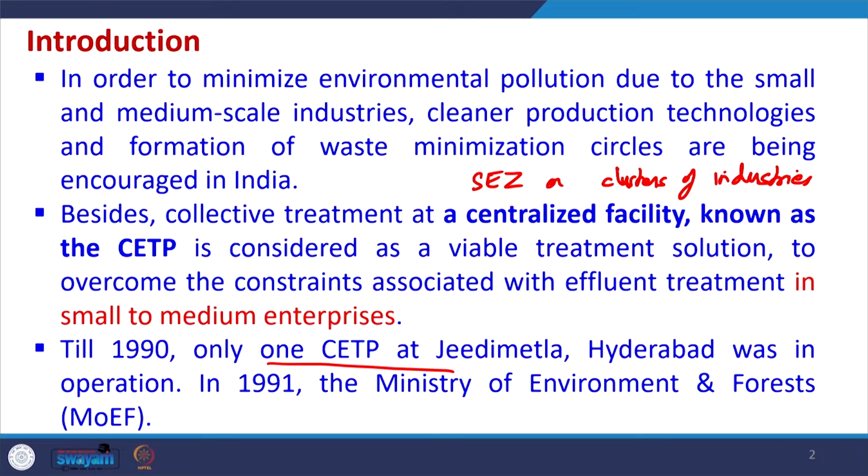Till 1990 only one CETP was functional, in Hyderabad. After that the Ministry of Environment and Forest, nowadays called the Ministry of Environment, Forest and Climate Change, has been pushing for using CETPs to treat effluents generated in small and medium enterprises. The government of India initiated a financial support scheme for CETPs to ensure the growth of small and medium entrepreneurs in an environmentally compatible manner.

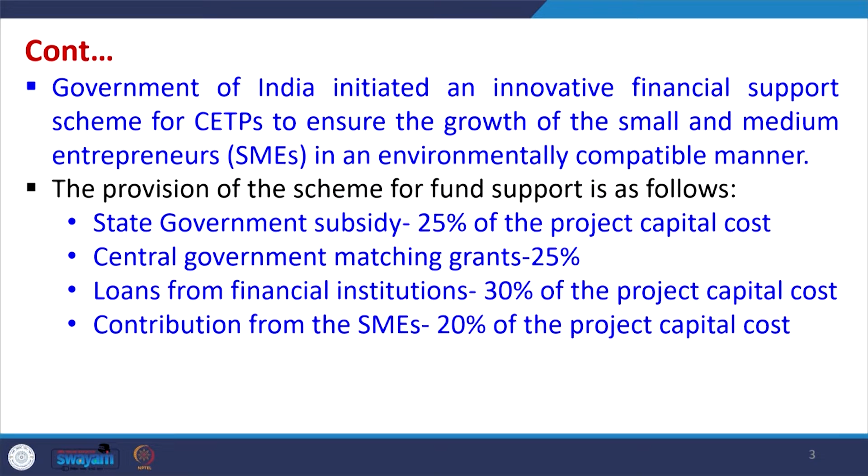The provisions of the scheme for fund support are: the state government gives a subsidy of 25% of the project capital cost, the central government gives a matching grant of 25%, and loans from financial institutions are available. The small and medium enterprises have to give around 20% of the project capital cost. This is how CETPs are being implemented.

Now, the concept of CETP was adopted to achieve end of pipe treatment of combined wastewater and avail the benefit of scale of operation. If individual industries start treating the water, they will require a lot of land space, energy input and cost input, which will cause problems because the amount of water generated in these industries may be small. If we combine all the water, the amount will be high, the treatment can still be done, but the cost comes down tremendously. To avail this benefit, the concept of CETP has been adopted.

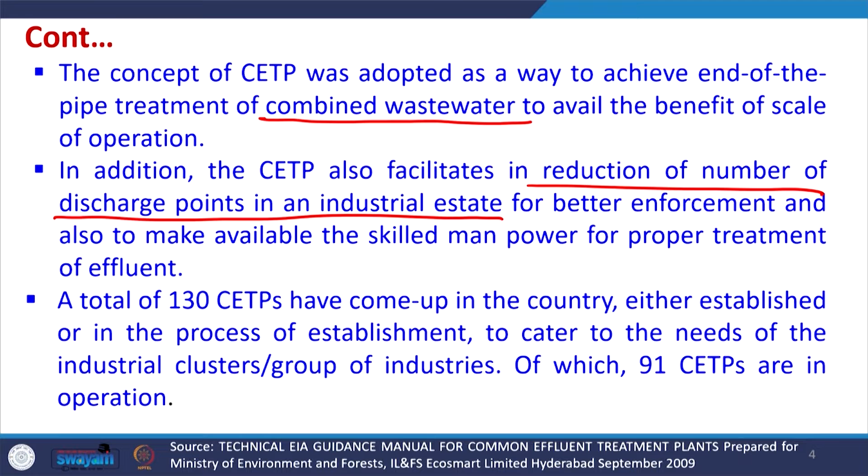In addition, CETP also facilitates the reduction of the number of discharge points in an industrial estate. If we have an industrial cluster and each industry has its own discharge point, it is difficult to manage and enforce the norms made by the government. But if the CETP is there, we have only one discharge point, which can easily be monitored and enforced.

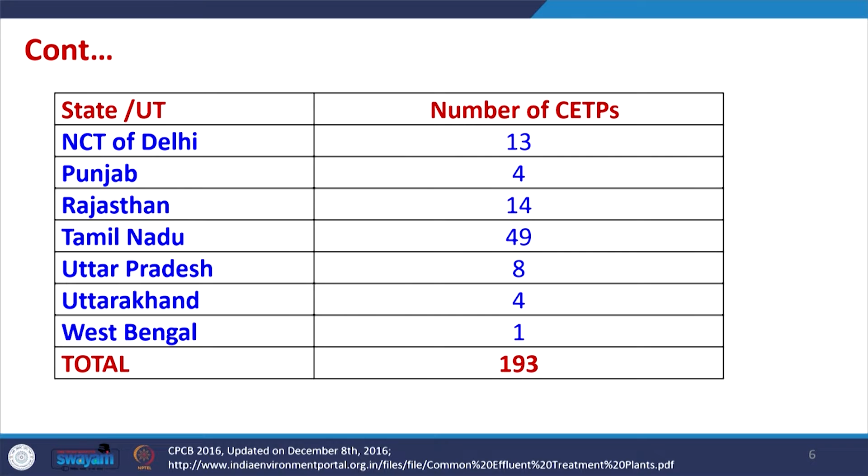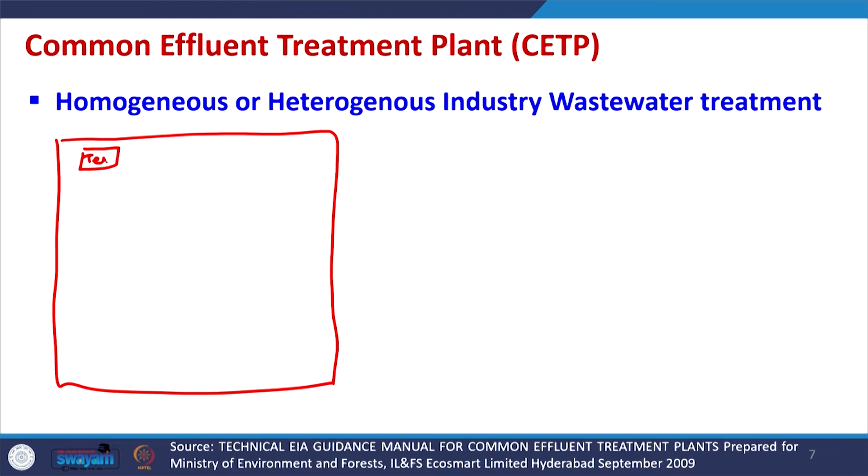Now, these CETPs can treat homogeneous and heterogeneous industrial wastewater. Let us try to understand how they work. Suppose we have a cluster of industries, which we are marking here. One of the industries may be textile, another may be pharmaceutical, and another may be producing some other type of chemicals, maybe a food processing industry.

Similarly, another industry may be there where other types of products may be formed, like surfactant, detergent, etc. So, these are different industries. Now, each of them may have to adopt a different treatment strategy for their wastewater. What is done is that all these industries are told that they have to adopt some treatment strategy. So, this is called ETP or primary treatment strategies in each of the plants.

So, each unit will be having some primary treatment, we can call it PT, or many of the industries have to adopt more treatment, so it may be up to ETP also. After that, they do not go up to the standards, they only perform primary treatment, and the effluents generated from all these industries are merged together, and we have a larger CETP which actually treats the effluent. So, this is the strategy which is adopted.

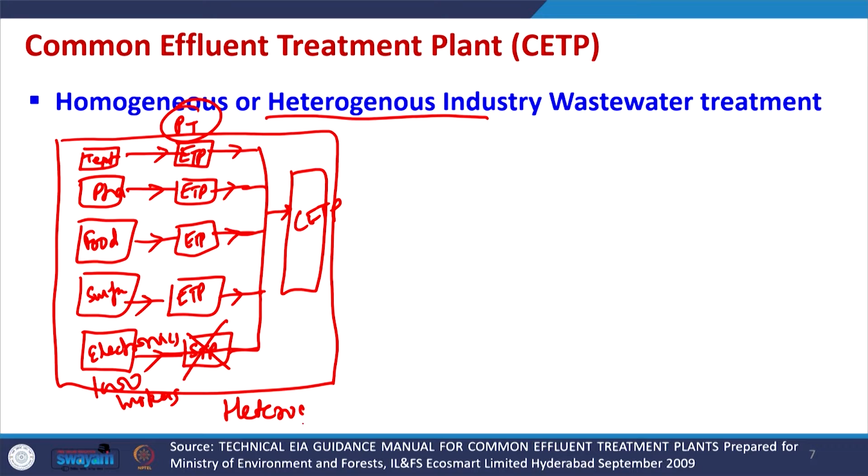Similarly, there is a possibility that in an industrial cluster only one type of industry is there. Suppose all the industries are pharmaceutical: pharmaceutical 1, pharmaceutical 2. Similarly, I have seen myself that in one of the clusters only electroplating industries were there. So, I am writing just EP. All the industries are electroplating.

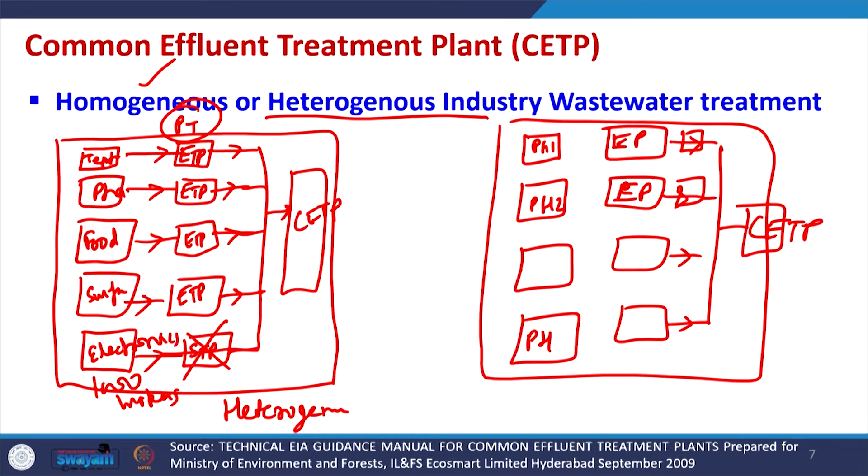Under that condition they may not require any treatment. If they have the same characteristic, the water may directly get combined and go into the CETP. If their characteristics are different, some primary treatment may still be used in some of the industries, while others may not. So, we have the possibility of homogeneous industrial wastewater treatment: all pharmaceutical, all electroplating, or all textile units. Depending upon that, the wastewater generated will go into the CETP.

Now, understanding the advantages of CETP. The advantage is that it facilitates economy of scale, because we are treating a large amount of wastewater. The treatment cost in rupees per liter will go down very quickly, because we are treating a large amount of wastewater as compared to a small amount. So, the cost of pollution abatement will be much less than if the treatment is done in the individual SMEs.

Also, many small scale industries cannot build effluent treatment units because their space is very less; they may be built in a very small space. They do not have the space for these treatment units. So, the lack of space issue can be taken care of in the CETP scheme. CETP can be planned in advance to ensure adequate space is available, including plans for later expansion if possible.

Now, it is also possible that in the actual treatment plant homogenization of the wastewater which is getting generated is being done, because all the wastewater is getting mixed. So, we have a homogeneous wastewater which is coming. In this case, we have to take care that no peculiar pollutant is coming out from these industries which is getting mixed with other industrial wastewater and making the entire industrial wastewater untreatable.

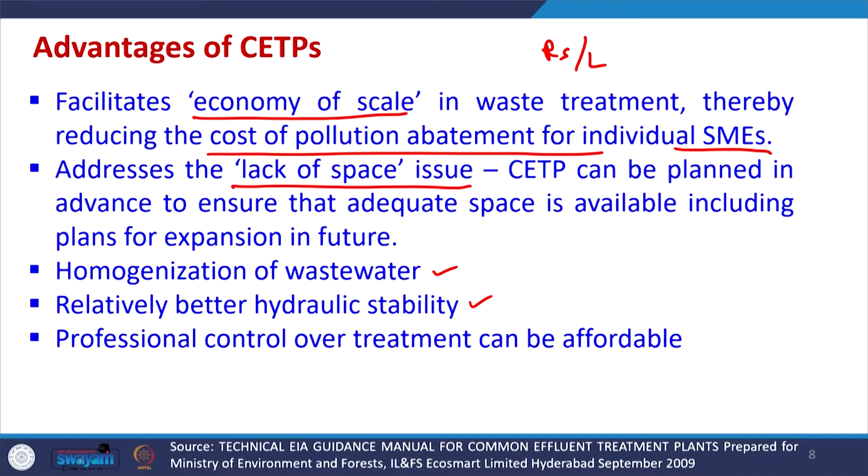So, that aspect is certainly there, but still we are making the wastewater homogeneous in nature, so the treatment becomes easy. Relatively better hydraulic stability is also there. We can professionally control the treatment and it can become affordable also. Now, the concept of CETP facilitates small scale units which often cannot internalize the externalities due to control of pollution. So, all these SMEs become free in a way with respect to thinking of the pollution that they are doing.

Now, this eliminates multiple discharge points in the area, because all the industries within that cluster are discharging the effluent only to the CETP, where further treatment is done. It also provides opportunity to improve recycling and reuse, because the wastewater after that can be used in the whole industrial cluster for gardening, for irrigation, etc., and also for reuse in the industries themselves. So, they can also take back the water. It also facilitates better organization of treated effluent and sludge disposal in the CETP.

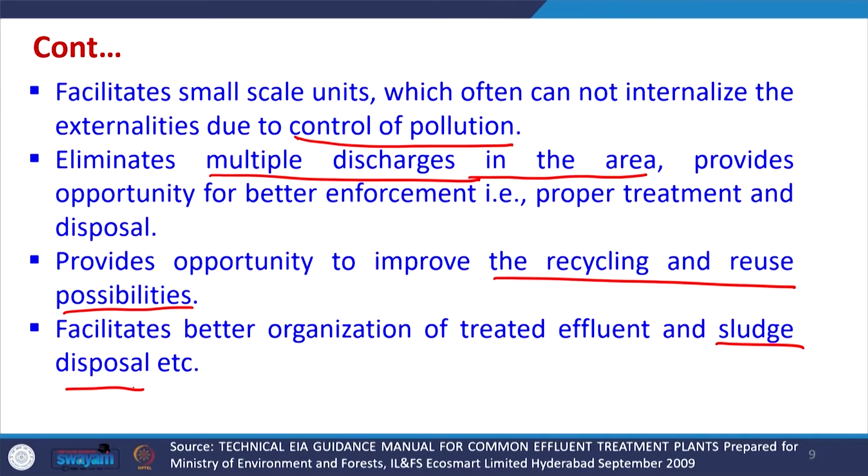Now, what are the problems and constraints with respect to use of CETP? There are certainly advantages, but there are some problems and constraints also. The consistency in compliance to the prescribed standards by the CETP is constrained by many reasons. These CETPs operate on a one size fits all basis. That means they always expect the water to be of somewhat homogeneous nature. Now, any time there is some problem in an industry and the ETP of that industry generating some peculiar pollutant is not working well, the operation will be affected.

Also, all the industries may be discharging different quantities of wastewater. So, if all are levied the same amount for the treatment of their wastewater, then they may cause operational issues. There is lack of access to capital investment, sometimes working capital, specialized technical skills which are required in the CETP, and inconsistent effluent quality. This is the most important parameter, because if any industry is not properly doing the pre-treatment, in particular in a heterogeneous CETP, then a lot of problems may happen. The treatment can totally go off in the CETP.

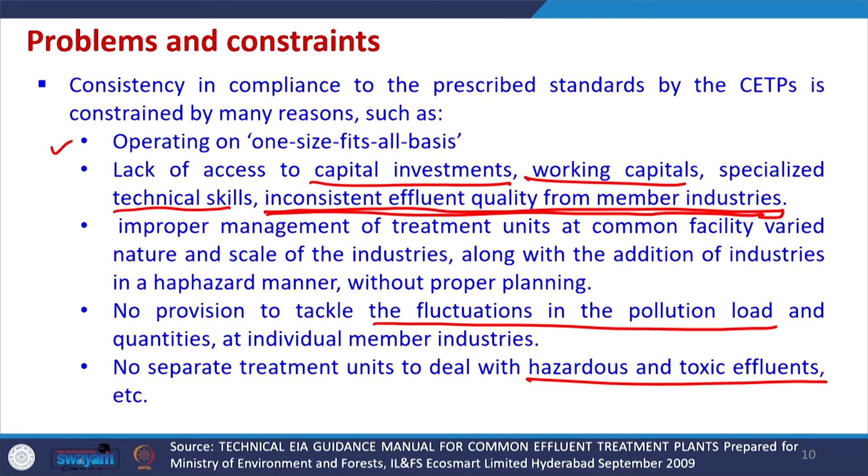Now, improper management of treatment units at a common facility varies with the nature and scale of the industries. If more industries are getting added in a haphazard manner without any proper planning, then the CETP may not work properly. Also, there is no provision to tackle the fluctuations in the pollution load, which is very important: the inconsistent effluent and the fluctuation in pollution load and quantity from the individual member industries. If any of these issues are there, problems will happen with treatment in the CETP. There are no separate treatment units to deal with hazardous and toxic effluents generated in some industries, which may also be a constraint.

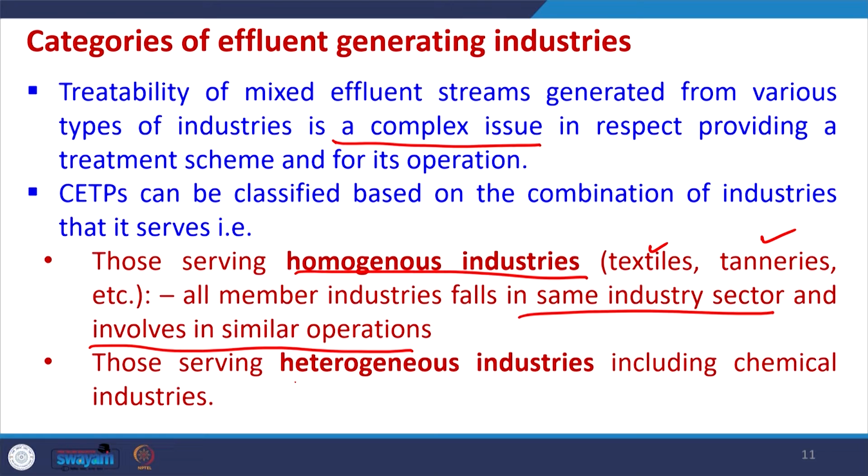Categories of effluent generating industries we have already discussed. Treatability of mixed effluent streams generated from various types of industries is a complex issue. It is not very easy with respect to providing a treatment scheme and for its operation. CETPs can be classified based upon the combination of industries. Homogeneous industries we have already discussed: we may have a textile cluster, a tannery cluster, an electroplating cluster. All member industries fall in the same industrial sector and are involved in similar operations. In a heterogeneous industry cluster, there may be different industries.

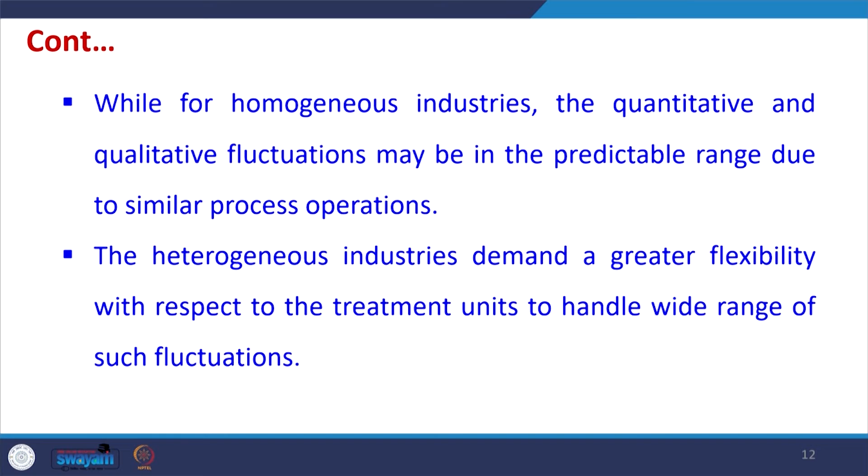Now, for homogeneous industries the quantitative and qualitative fluctuations may be within a predictable range, because their process operations are similar, but in heterogeneous industries the fluctuations may be high as compared to a homogeneous industrial cluster, and because of that there may be a lot of issues with respect to treatment of the combined wastewater in the CETP.

Now, the qualitative and quantitative fluctuations of effluent, in particular with respect to heterogeneous industrial cluster. The quantitative fluctuations specify the volume of the equalization basin. So, that data is required. Based upon that only the equalization basin of the CETP can be designed. So, in this way we can properly operate the CETP.

The modular design of effluent treatment plants is an important aspect of proper handling of varying hydraulic load, because some of these industries may be seasonal in nature or they may be operating in a batch mode. So, the volume may fluctuate a lot. That means the quantitative volume of water which is coming will be varying a lot, and the CETP needs to take care of these fluctuations.

Now, the capacity of equalization or holding tank must be properly determined to homogenize the influent characteristics, and it will help in avoiding the shock loads that will be going into the CETP.

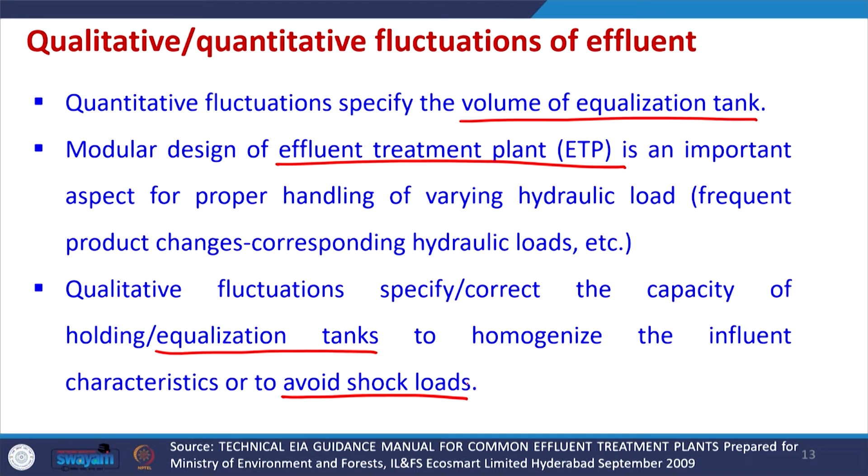Then the effluent quantity can be assessed based upon the product details furnished by that individual industry with a comparison from literature values and from the water balance submitted by the individual industry to that particular state pollution control board or that particular industrial cluster organization in their consent application. So, from that we can get to know how much amount of effluent they are likely to generate.

Also, with respect to capacity, with industries some idea is always available of how many liters of water they can discharge at maximum. So, from there also we can get to know what will be the quantity of effluent that will be generated.

Also, while arriving at the size of CETP with respect to flow, the various unit operations considered shall be sized and layout is prepared to add any additional units in future depending upon the projected growth rate of that industrial cluster. So, with respect to flow, it is possible that during the initial design the flow may be less, but with time more industries are going to come and discharge their flow into the CETP. So, that future expansion should be properly taken care of.

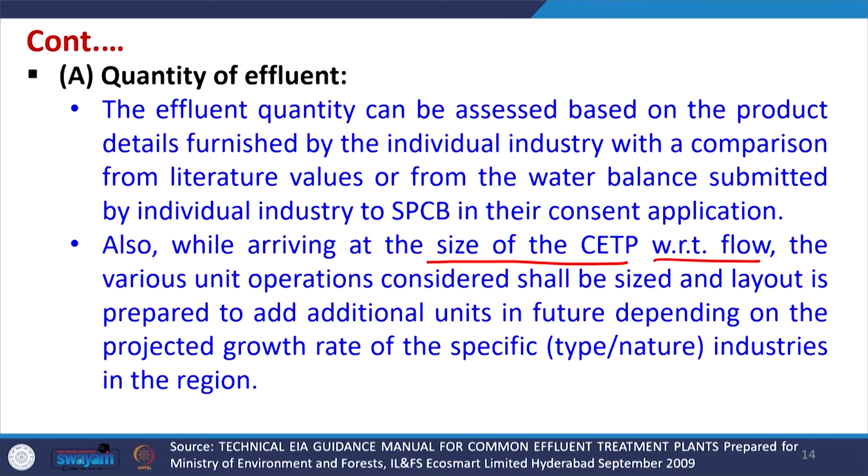Now, flow rate is important in determining the size of CETP. Minimum and maximum flows should be computed as they decide the hydraulic computations as well as the size of pipe distribution, because the pipes, channels etc. are being used to take the wastewater from different industries to CETP. So, we should have a tentative idea of minimum and maximum flows. Anticipated future increase should also be incorporated.

The temporal flow variations that may be there require use of equalization ponds to allow a constant flow rate through the downstream processes. So, we have lot of uses of equalization pond in CETP with respect to use of CETP in any industrial cluster.

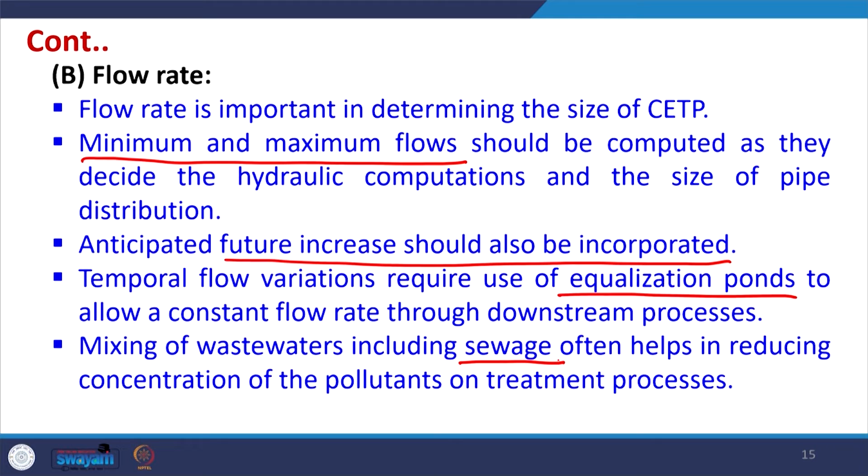Now, mixing of wastewater includes sewage often. As already told, suppose any electronic industry is there. That may not generate a highly industrial wastewater, it will generate sewage only. So, mixing of wastewater including sewage often helps in reducing the concentration of pollutant, but we should have a tentative idea of how much flow rate of sewage will be there.

Now, in addition to flow rate, the effluent characteristics are very important. The physical characteristics of effluent in designing the CETP which are very important include temperature. Temperature of effluents is useful in indicating the solubility of oxygen which affects the oxygen transfer capacity in the aeration equipments.

Then color and odor. Suppose any textile unit is there, that will discharge lot of color. Similarly, any other unit which is causing lot of odor, that also we should know. If color and odor is there, it indicates the colloidal portion and needs a specific treatment, maybe in that industry itself. So, that has to be seen.

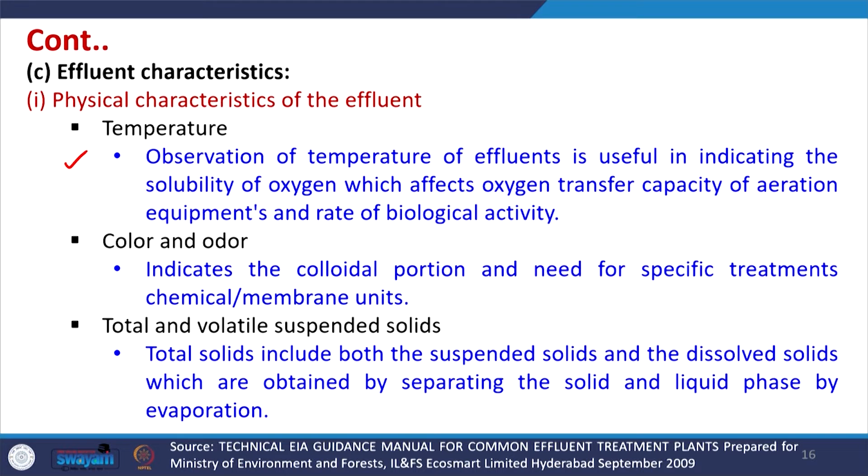Similarly, total and volatile suspended solids. They may be including both suspended and dissolved solids. So, their estimation is very important, and based upon that the CETP has to be designed.

The chemical characteristics of the combined effluent or individual effluent, the pH in particular. The biological treatment units of CETP are highly sensitive to pH. So, if any industry is discharging wastewater with highly acidic or highly basic condition, we have to cross check that, and see that the water going for treatment, in particular in the biological treatment units of CETP, has a homogeneous pH in the similar range, otherwise it will totally damage that biological treatment unit. So, it is very important that we cross check this.

Acidic effluents may also cause corrosion related problems in the pipelines as well as in the CETP itself. Now, many effluents contain lot of carbonaceous substrates. Carbonaceous constituents are measured by BOD, COD, TOC, etc.

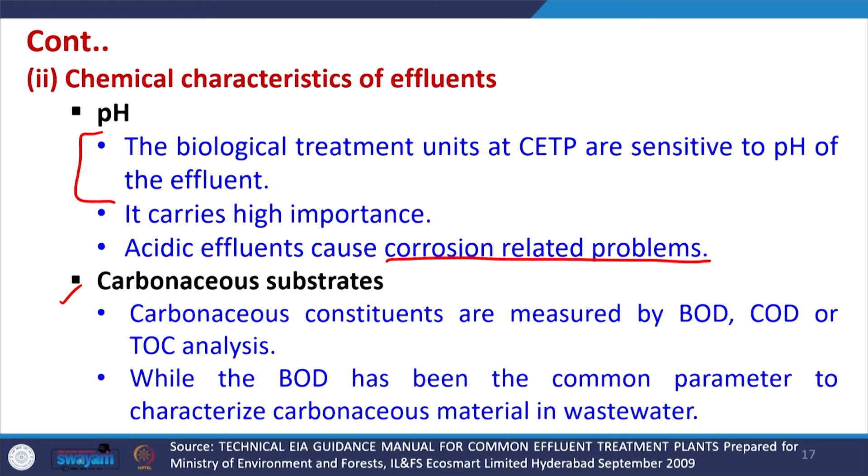These parameters already we have studied, so this idea should be there that what is the load that is coming to the CETP. Now, COD is becoming more common parameter in most of the current design models. This COD is more used, but BOD gives an idea of how much treatment is possible in the biological treatment units. So, if BOD and COD or their ratio is known, it gives a larger idea of what should be the treatment strategy, whether we require tertiary treatment, and what different types of tertiary units will be required.

COD value will always be higher than the BOD, this is well known. So, this estimation of BOD and COD is very important for design of CETP.

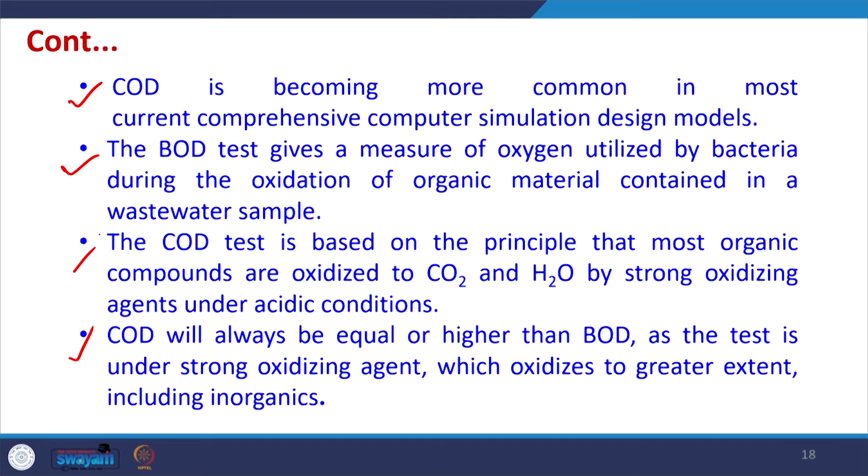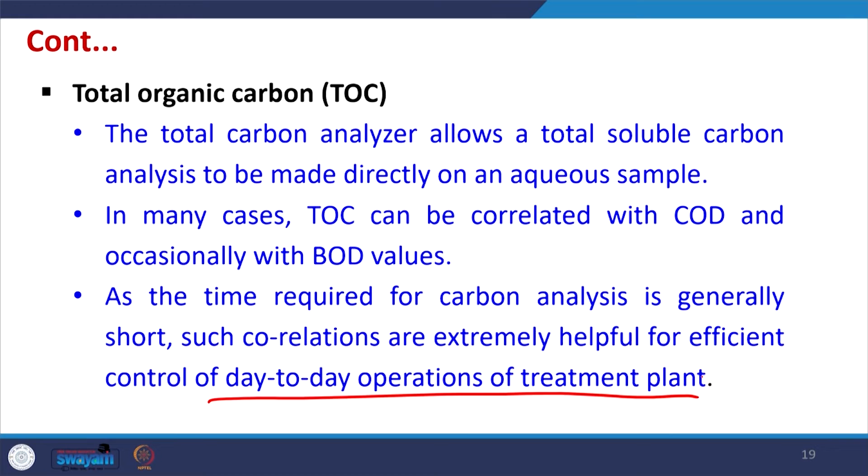Similarly, TOC is another parameter which is nowadays being used in place of COD, but it gives a tentative idea of how much total organic carbon is present in the water, and through this analysis we can control the day to day operations of the treatment plant itself. This is easy to estimate, but we require sophisticated instruments for measuring the TOC values.

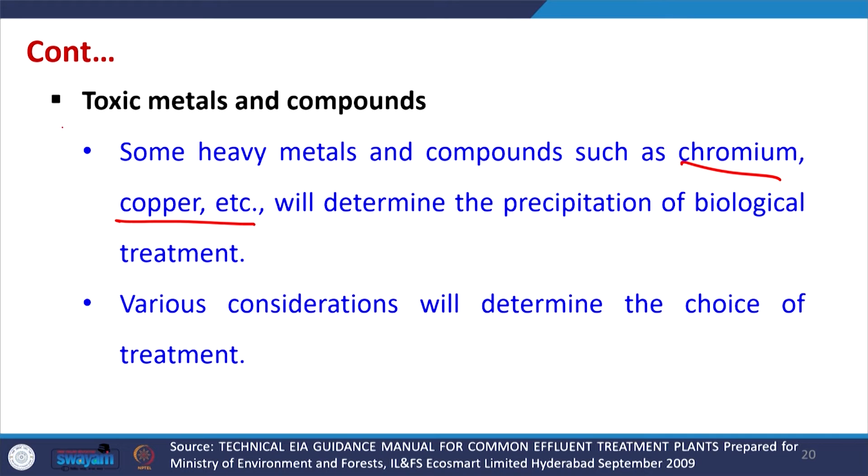Now, what types of toxic metals and other compounds are present in the combined effluent generated from these industries is important. If some heavy metals such as chromium, copper, etc. are present, they will determine the efficiency of biological treatment or how to remove these metals beforehand. So, various considerations may be there with respect to choice of treatment if these toxic metals or other compounds are present in the water.

Now, before CETP, it is always better to minimize the waste in the industry itself. So, waste minimization strategies in all these SMEs is very important.

Nowadays, in many CETPs, they are charging the industries with respect to how much quantity of water they are giving and what is the characteristic of the water. If they are doing waste minimization, the CETP will charge less as compared to when they are not doing any waste minimization. Along with the quantity of water, the characteristic of water is also defined in different ranges. So, they are levied with respect to rupees per unit COD, rupees per unit some particular key parameter.

Now, if any industry is discharging some highly objectionable pollutant to CETP, the amount of penalty levied on that industry may be higher. So, any parameter which affects the working of CETP, the charge levied may be very high. If any industry is discharging compounds or chemicals which may hamper the operation of CETP, that particular industry may be charged very heavily. Examples could be surfactant or very low pH wastewater or very high pH wastewater or any other parameter as well. So, it is very important that these industries should minimize the waste by themselves.

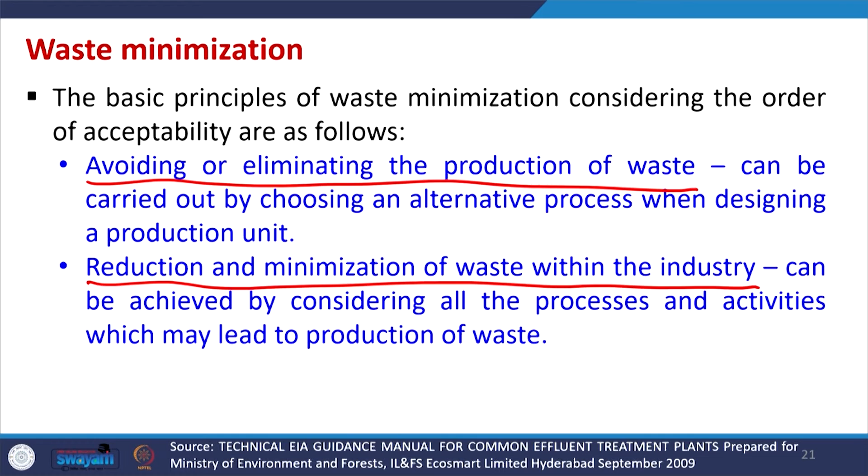Now, in each industry some pre-treatment may be required. In the initial times, the CETPs were considered to be the sinks of all the raw effluents from the industries, and because of that they suffered a lot of problems, not knowing what pre-treatment strategies have to be followed at the industrial level or at the CETP level.

Now, in many industries the industry themselves have to do the pre-treatment. Scientific understanding of complex characteristics of the wastewater generated in different industries have helped in understanding what type of key pollutants need to be removed beforehand. So, this way the pre-treatment has to be done.

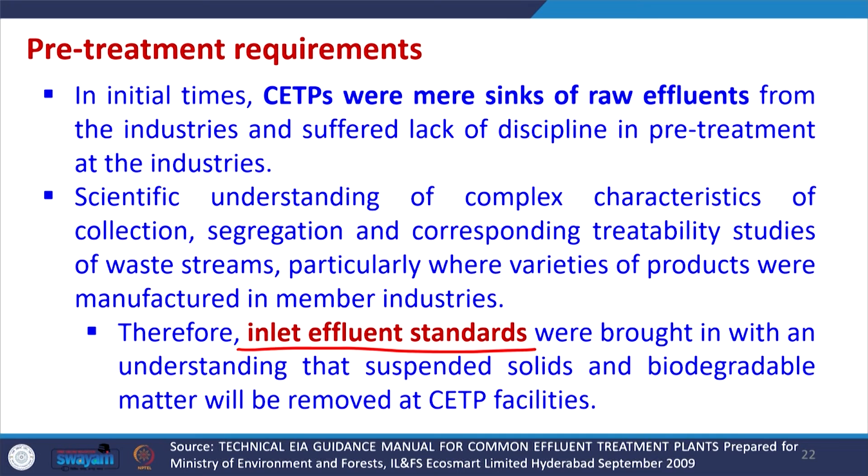So, the inlet effluent standards have been set for many CETPs. They will be taking effluent with some particular characteristics, and if the variation is way beyond that, the amount of charge for that particular industry will also vary. This inlet effluent standard was brought in with an understanding that suspended solids and biodegradable material will be removed at CETP, but other types of things have to be removed beforehand. Any peculiar compound or chemical has to be removed beforehand in the industry itself.

Now, the pre-treatment of industries' effluents from industrial processes requires some form of pre-treatment prior to sending the effluent for further treatment at CETP. This is mainly required when wastewater is carried through gravity lines, to minimize corrosion and clogging, and to prevent the reduction in biological treatment process efficiency due to any toxic constituents or otherwise. That is why the pre-treatment has to be done in the industry itself. The pre-treatment standards for sulphide, sulfates, pH are highly objectionable and they have to be treated beforehand.

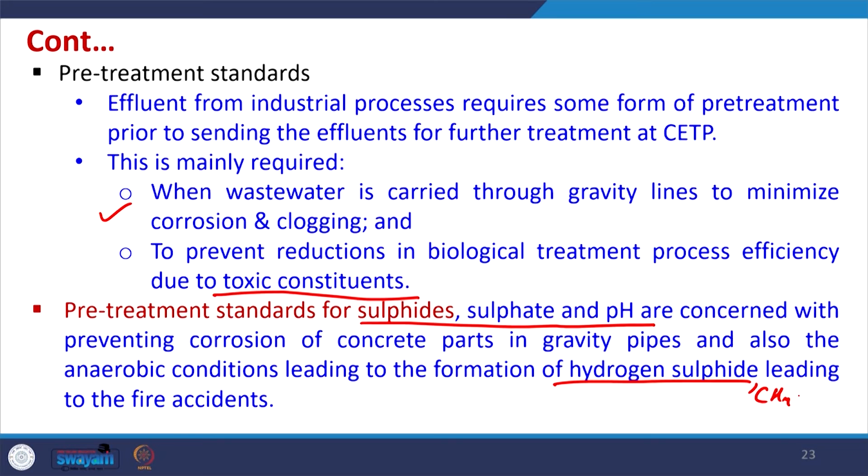Either the industries have to treat their effluent individually, or some industries can mix them together before sending to the CETPs, but this treatment has to be done beforehand. Similarly, in the pipeline there may be formation of anaerobic conditions, which may lead to formation of hydrogen sulfide, causing fire accidents, along with methane formation. All these aspects have to be taken care of in the pre-treatment itself.

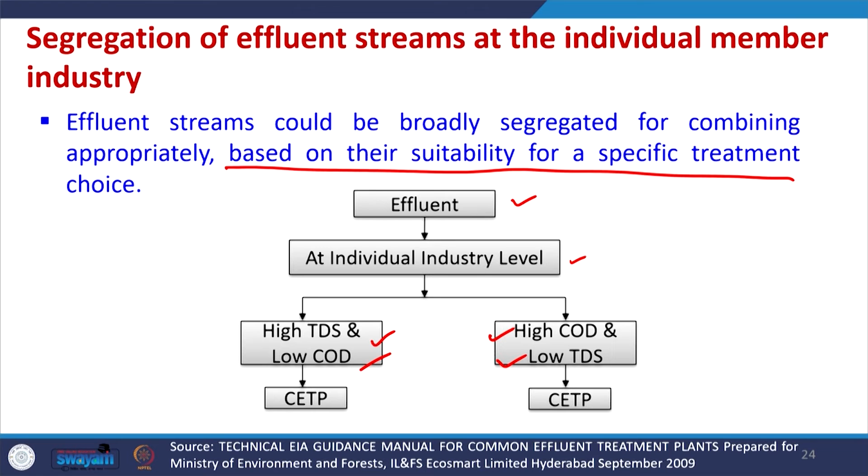Before sending the effluent to the CETP, segregation of effluent streams at the individual member industry level is very important. Effluent streams could be broadly segregated by combining them appropriately based upon their suitability for a specific treatment. Effluent at individual industry levels may be classified into high TDS low COD, or high COD low TDS, and the treatment strategies could be different in the CETP for such wastewater. So segregation is very important.

In organic chemical industries, similarly, there may be different types of wastewaters generated. When the member industries of a CETP comprise chemical industries or multiple industrial categories, the complexities with respect to operation and maintenance become very high in the CETP, and they demand very high specific skills.

So it has been felt that there is a need for qualitative assessment of effluent streams. All member industries need to perform this qualitative assessment and must segregate the effluent generated into streams such as high inorganic streams, highly concentrated effluent, non-degradable or toxic effluent containing non-degradable compounds, or mixed streams where both organic and inorganic components are present. This type of clustering and segregation of different effluent streams is highly important before sending them to the CETP.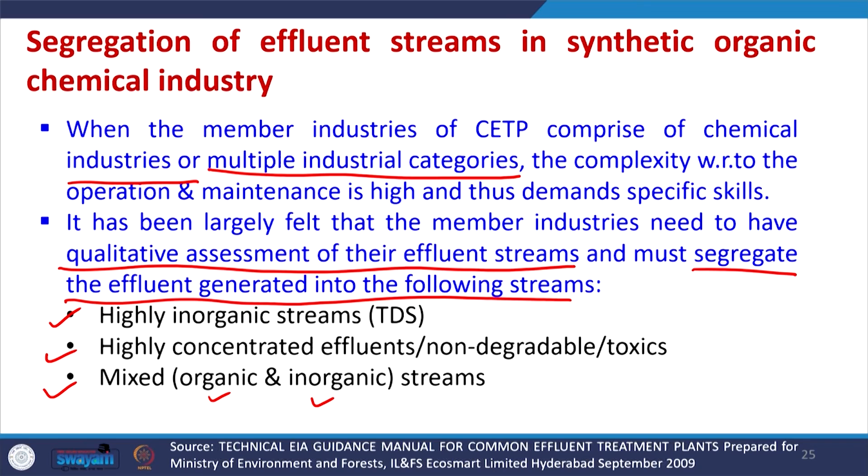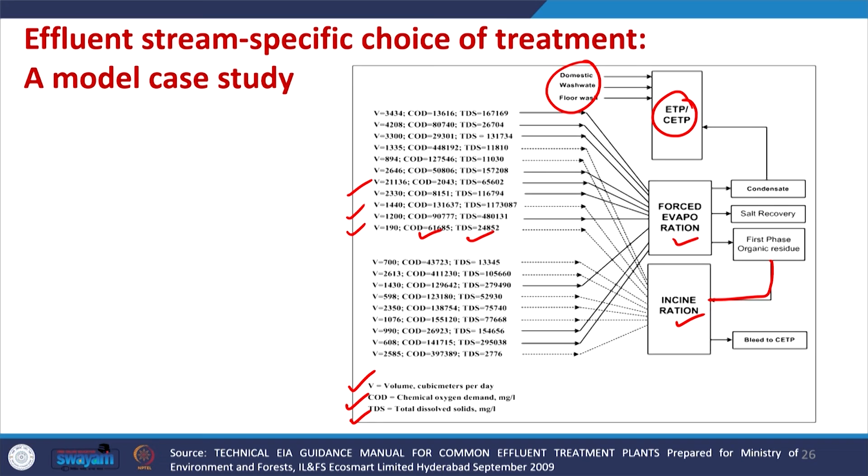Before sending water to the CETP, forced evaporation or incineration may have to be done, depending on COD, volume, and TDS. So any treatment may have to be done beforehand or afterhand, and segregation has to be done properly before using the CETP.

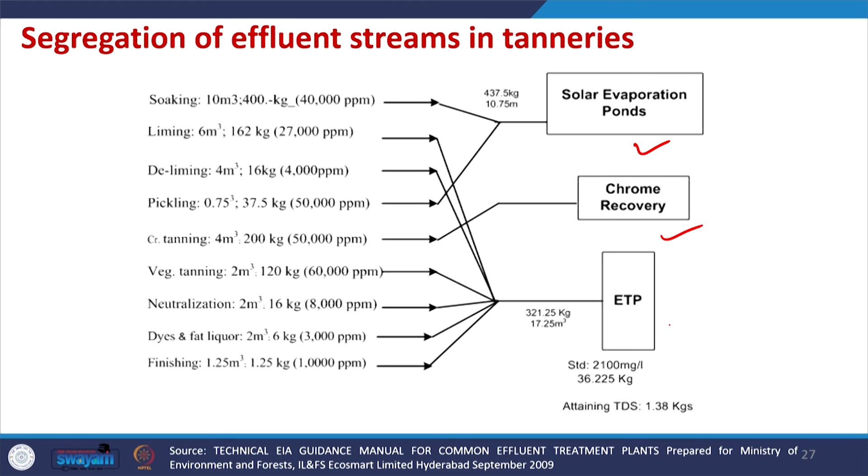Similarly, for tanneries we may have different choices like solar evaporation ponds, chrome recovery units, or an ETP beforehand, before sending to the CETP. For textile industries, many possibilities exist, since some industries may generate only dye bath effluent while others generate only washings. Depending upon the requirement, they may have different treatment strategies before further treatment in the CETP.

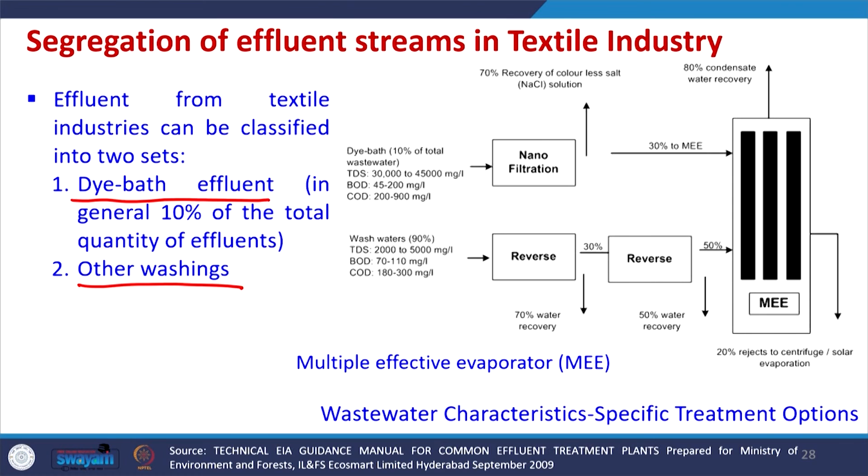Once wastewater has been generated in different industries, it has to be taken to the CETP. The conveyance system plays an essential role in the cost effectiveness of treatment, besides the ease in plant operation.

For the modes of collection of effluent from individual industries to the CETP, pipes and open channels are generally preferred, while tankers are less preferred. But if gravity flow cannot happen, or if pipes and channels have not been laid, then tankers can be used, or a combination of any of these modes for conveying water from individual industries to the CETP for further treatment.

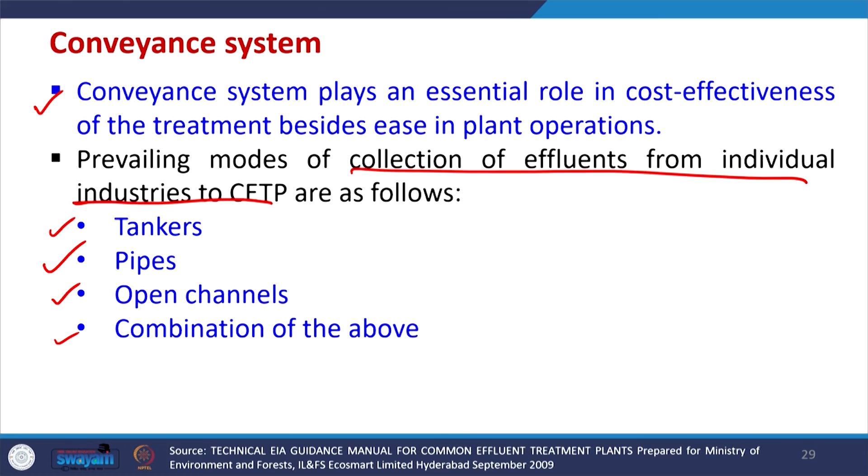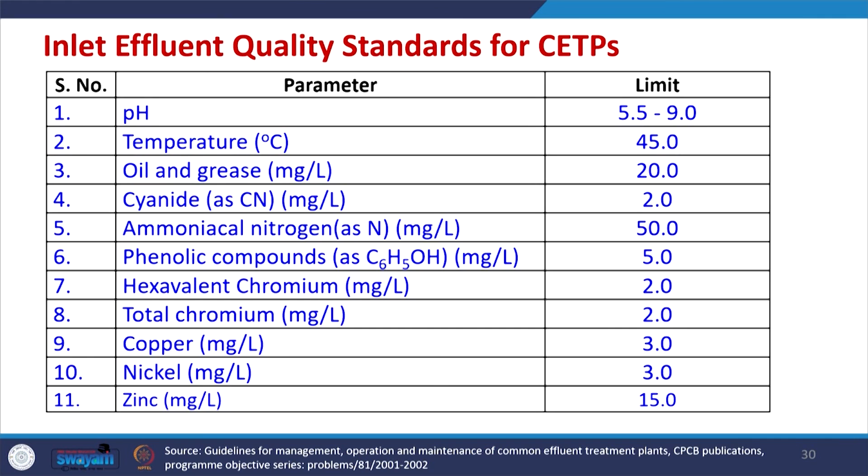In the CETP, the inlet effluent quality standards may vary. These are the different standards which have been set, and it may vary from CETP to CETP depending on whether it is heterogeneous or homogeneous.

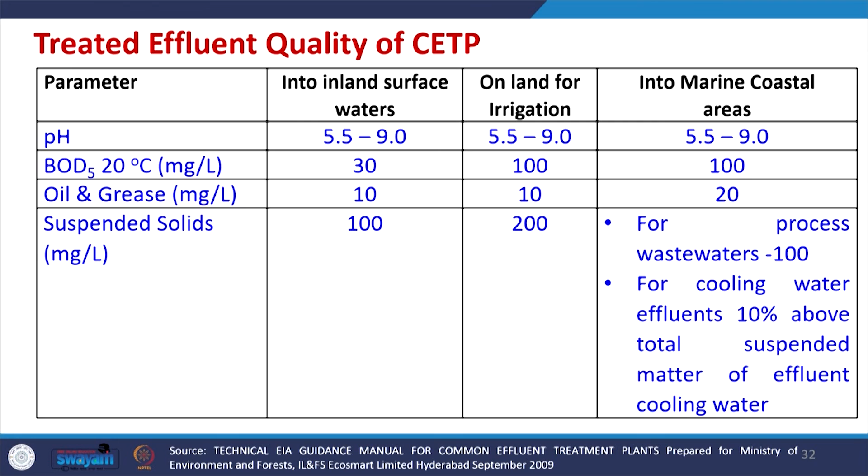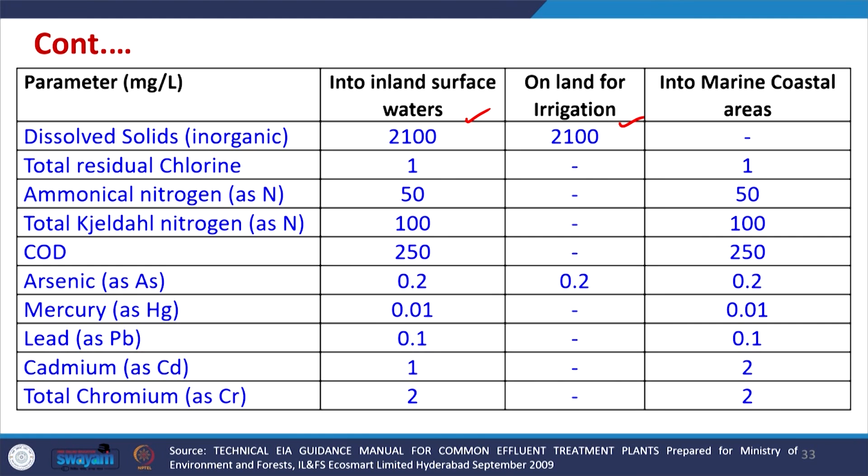In the next lecture, we will try to understand the different strategies possible with respect to treatment in the CETP. We will also compare the different treatment strategies with respect to their application for treatment of various types of wastewater, which we will summarize in the next lecture, the last lecture of this series on physico-chemical treatment of wastewater. Thank you very much.